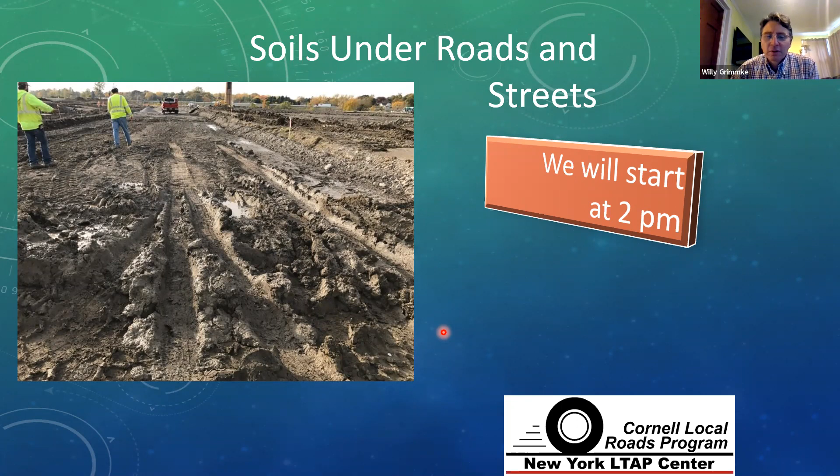Okay, why does it matter? Just by a show of hands, have any of the attendees dealt with pavements that have started to fail due to what was supporting it? If you don't know how to do that, drag your mouse to the bottom, you'll see a participant list, and you can raise your hand down at the bottom. Okay, I see a lot of hands up, and I see one of the hands is Bill Lamy, who was my counterpart in a neighboring county while I was serving in county government. I'm sure he has all kinds of horror stories about failing pavements and bad soils, because in our part of the world, one of the things we were blessed with was the Champlain clay. It's a tough material to build roads on.

So we're going to start out with where we are with our road. Up on the surface that we drive on, we've got our pavement. Below that, we have a base course, often an asphalt stabilized base course, but sometimes stone. Then below that, we'll have a sub-base course, which is often a crushed stone material or a bank run gravel material. Below that, we have our subgrade, which is our native soil, or it's an embankment that we've constructed. That's a lot of what we're going to be concerned about today, although we will talk a little bit about bases, sub-bases, and surface courses.

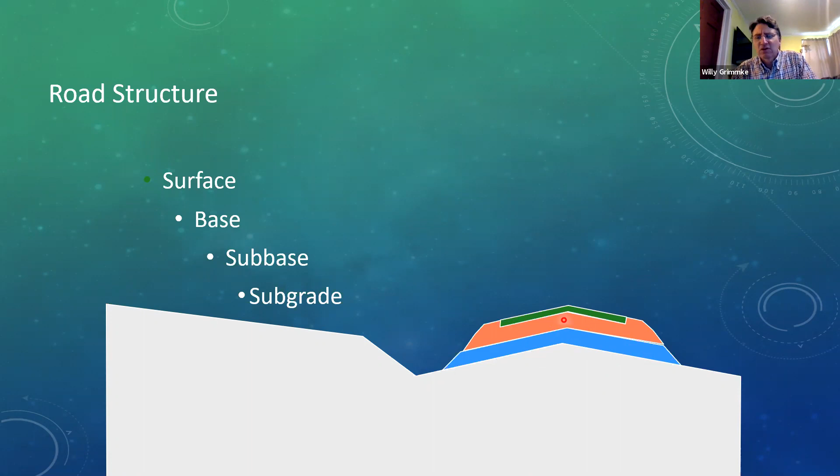So just so everybody's on the same page, when a vehicle drives down the road, it imparts load on the pavement, and depending on the thickness of the pavement, it distributes that load to the various layers below, be that asphalt, base, sub-base, and then ultimately the subgrade below it. I'll show a slide later which demonstrates what happens when vehicle loads travel on soils without that pavement or thickness separation.

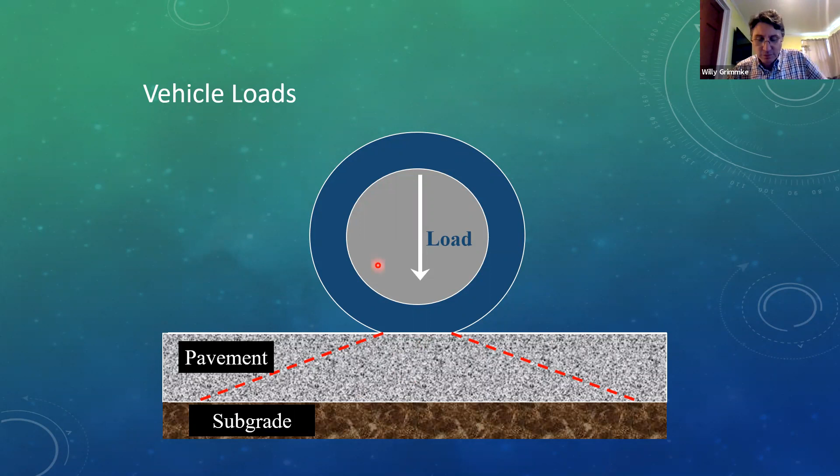What happens as the wheels progress along the road is it will deflect the pavement, particularly with asphalt pavements, which are flexible by design. When anything flexes or a moment is put on it, you tend to get this pattern where it deflects down in a smiley face type manner, and you get compression at the top surface, but you get tension at the bottom. As many of us know, asphalt pavement is not stellar in tension. So what we want to have below is subgrade, subbase, base courses that support the pavement and minimize the amount of flexing so you're not putting it in a lot of tension.

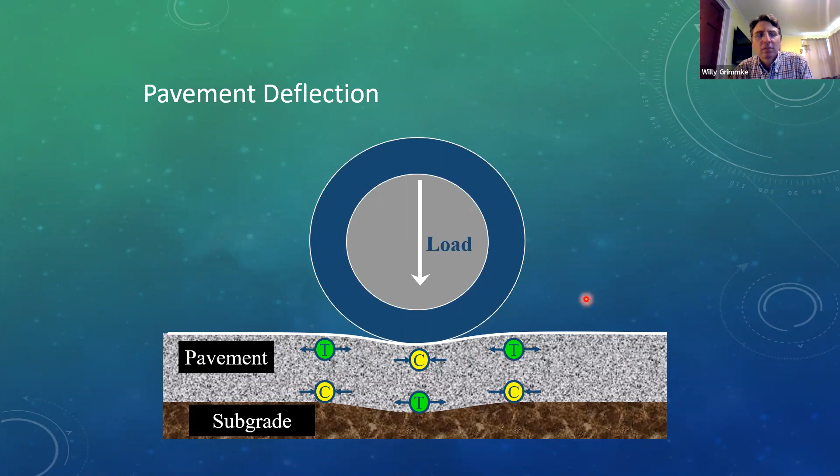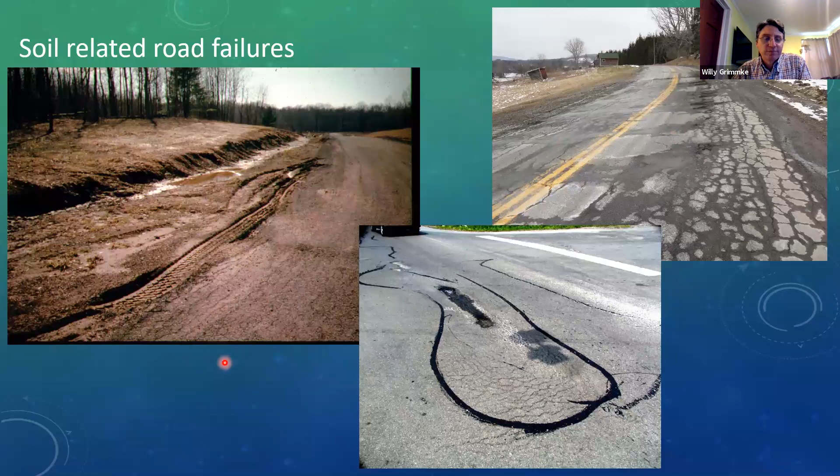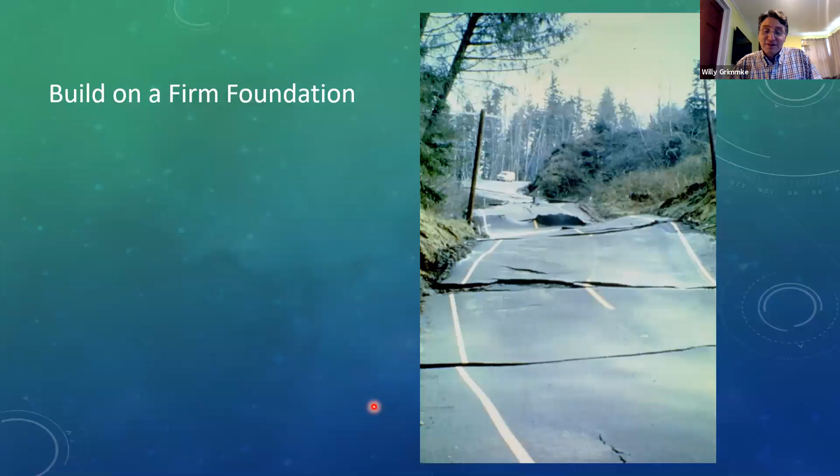So one of the things we're emphasizing here is we want to build our roads on a firm foundation. This particular photo was taken in Alaska after an earthquake, so it's an extreme case, but I'm sure many of us who have been in the road stewardship business have seen pavements, like we saw in the prior slide, that are not built on a firm foundation and begin to fail otherwise.

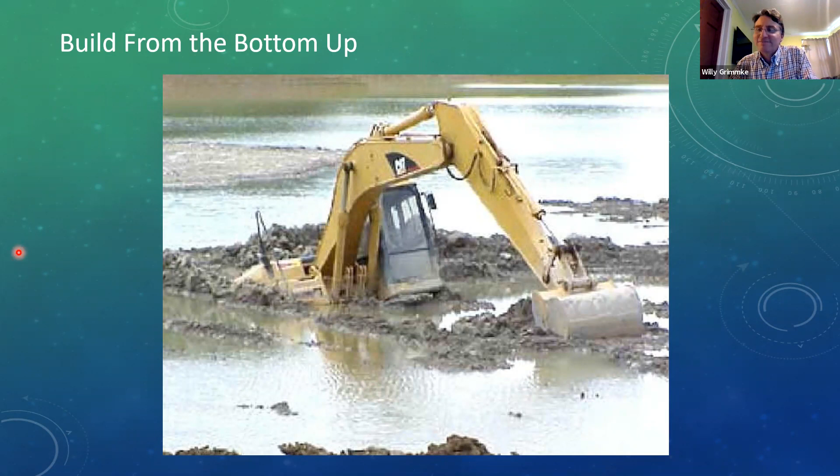Okay, so our subgrade, what we're looking for with our soils, and what we have and how it's characterized. Gravel is in the size range from 1/16 of an inch up to 3 inches—good size material. We have sand, which is from 3/100 of an inch up to 1/16 of an inch. And we have silts and clays, which are particles smaller than 3/100 of an inch, and silts and clays behave a little bit differently.

Now, what we have down below here is gravel. When I was in county government, the town highway superintendents would come to me and say, hey, we're going to resurface our road, or we're going to do some road work, and the farmer down the road has a bank of good gravel that we can use. They would be referring to the blend of size fractions that had gravel sized particles, as opposed to gravel in the soil sense, which is the 1/16 of an inch to 3 inch size only.

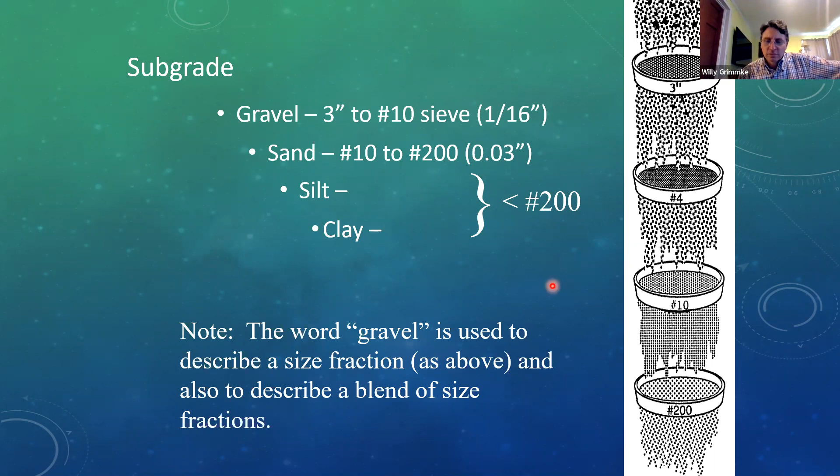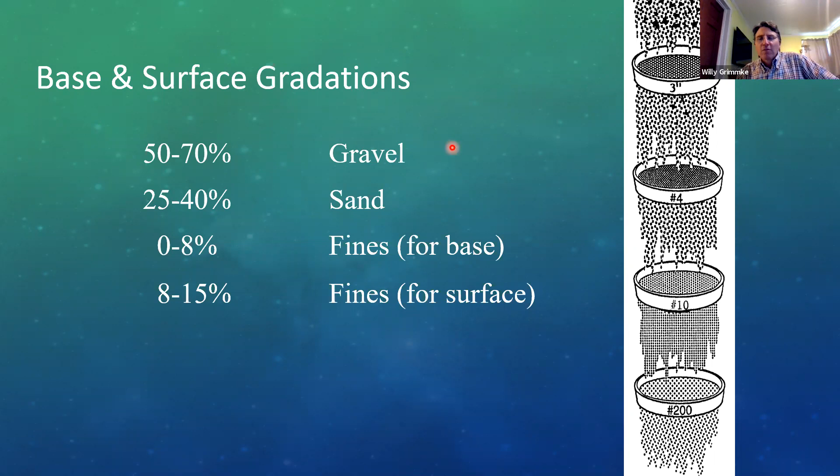So if we're doing base and surface courses, what we're looking for are blended materials that are between 50 to 70% gravel, 25 to 40% sand, and a low percentage of fines. We want 50 to 70% gravel because those particles are big and chunky, and they will help support and distribute the weight. We want the sand to fill in between those voids in the gravel, and some fines in surface course, though it's not as necessary in a base course.

We want fewer fines in the base because we want it to be permeable and we want water to flow through it. Where with a surface course, we want some fines to bind that all together, so when we're driving down the road, it tends not to washboard. The stones and sand don't tend to come apart—it all stays more or less stuck together.

Just a show of hands, has anybody driven down a gravel surfaced road and had it seem nice and firm and hard, almost like it was paved? This typically doesn't happen in March or April, but sometimes in August it will be like that. Okay, yeah, collectively the group has. And that's because that gravel road did have enough fines in it to keep everything held together, and as it dried out in the summer, it tightened up and it was nice and hard.

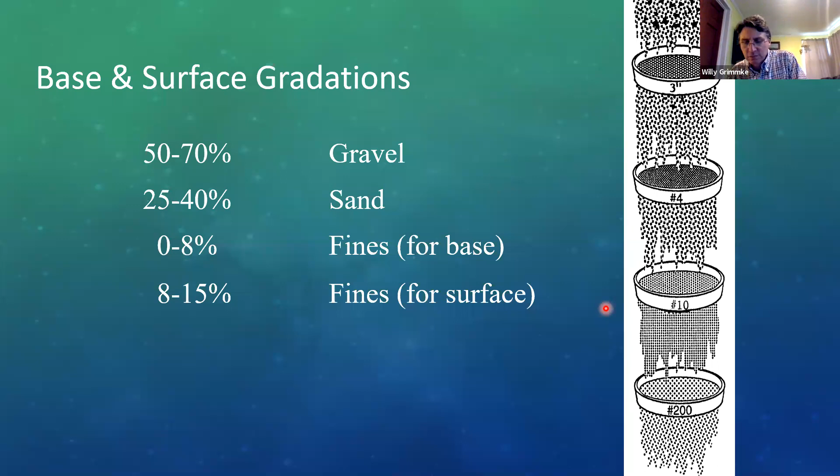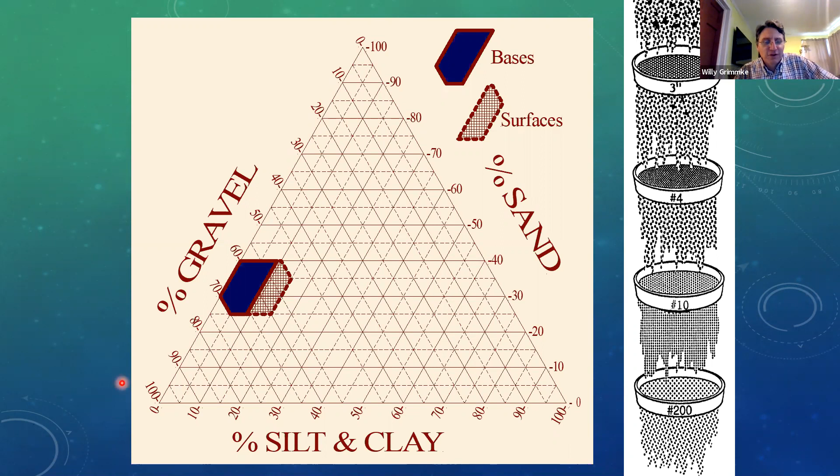As anybody who's dealt with soils will tell you, there aren't any guarantees, and what we're just trying to do is maximize our probability for success.

So one of the things we can do in the field is visually identify what kind of soils we're dealing with. If you have gravels, you can look at it, 3 inches to 1/10 of an inch. Sands, 1/10 down to invisible particles. And then silts and clays.

Does anybody know how to determine whether you've got silt or clay? If you do, you're welcome to type into the Q&A pod.

And we'll see who the winner is. Because when you're dealing with...

Caroline, Gary, roll it in a ball or ribbon hand test. You roll it into a little snake and see if it holds together. If it holds together, it's typically clay. If it falls apart, it typically isn't. Gary says run a gradation or plasticity index test, which is the right way to do it, although some of us don't always have that equipment or time at our disposal when trying to make judgments in the field.

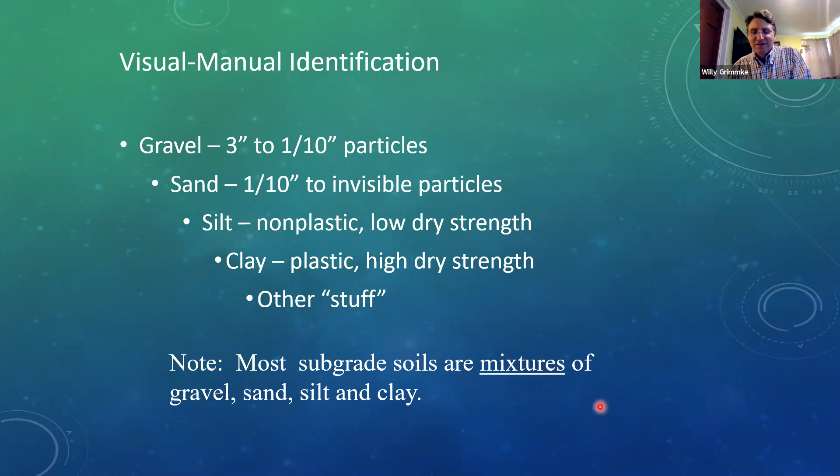So, moving on, how does this affect our pavement? What characteristics of soil are we looking for under our pavement? Permeability being one of them. How much does water flow through it? Is it free draining?

Capillarity - are the voids between the soil particles so small that it will pull water up? Frost susceptibility, which we'll go into in more detail, is a combination of capillarity and permeability.

Stability - can you drive on it, or is it like that first photo at the beginning where it's unstable and you get ruts? Will it compact? Can you get a nice dense soil that will support vehicles? And moisture content, which has a lot to do with compaction - how much moisture is in it in its natural state, and will that allow us to compact?

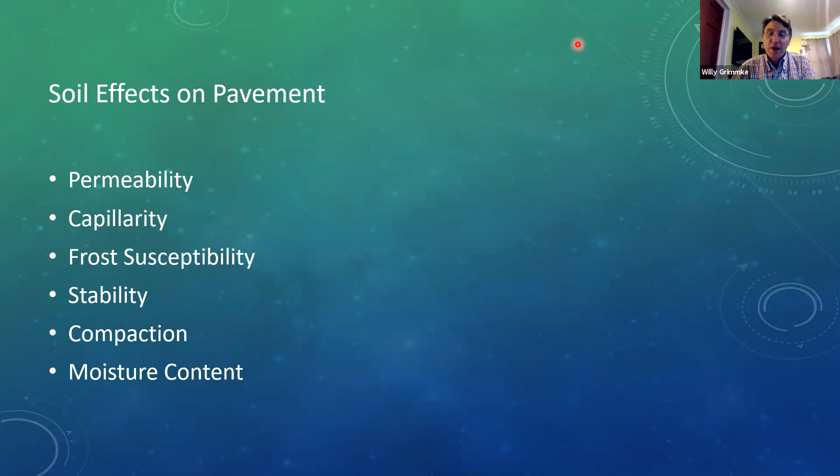Okay, talk first about permeability, and you can see we're all over the park. Gravel can be up to 30,000 feet a day. Water will migrate 6 miles a day through gravel, about 1/10 of that through sand.

That's one of the reasons those of you with exposure to water and wastewater treatment use sands as filters. Silt, not so much - down to 3 feet a day, a little bit of flow, but not too much. And clays, very little. Many years ago, Washington County owned a landfill site jointly with Warren County, and it was all clay because we didn't want leachate going into the groundwater. So clay does not let water go through.

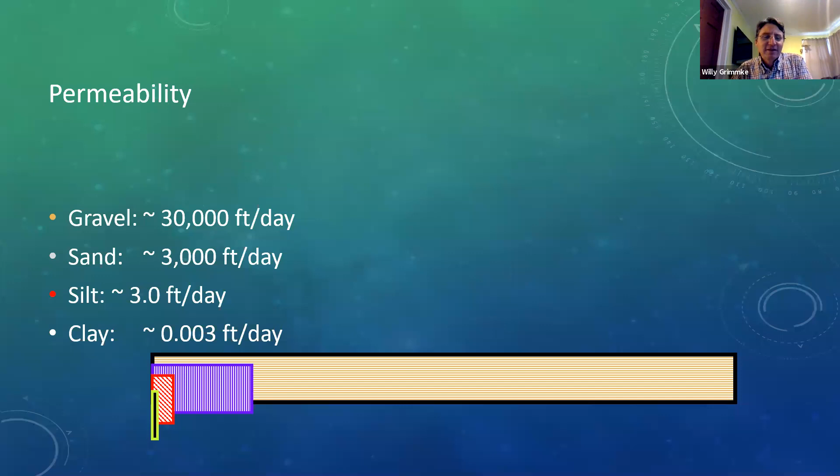Now, capillary rise. Because of the small particles and the voids in between those particles, how high will water get sucked up? With even small gravel, it's very little because the voids are big. With coarse sand, it can come up to 6 inches.

And we do a demonstration in the instructor-led 'Doing Local Roads and Streets Right' class, where we demo capillarity in sand. We pour it in basically a test tube, and you can see the wet line rising about 6 inches over the course of the class. Fine sand even higher, and then silts and clays are substantial - you can be several feet above the water table and still have wet soils because of the capillarity.

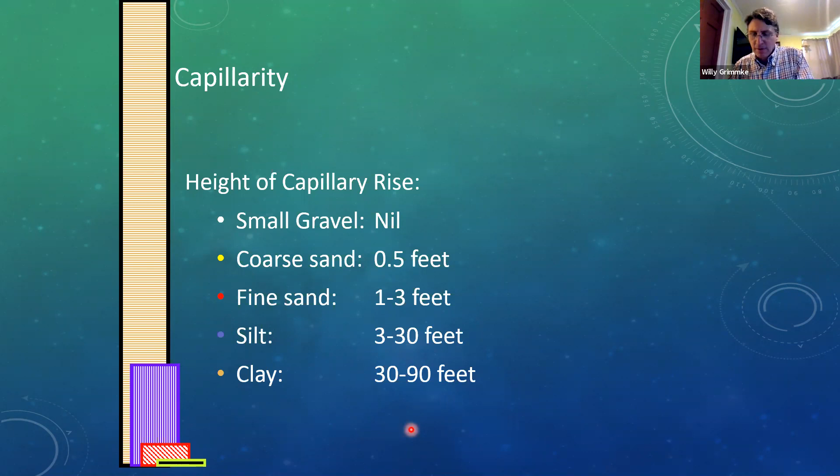So, poll question: Which soil has the highest permeability?

All right, when we have answers, we'll see how everybody's doing. Not quite the 75% there, Willie. We're getting there. Okay, well we'll give them another 10, 15 seconds, and then we'll go ahead and show the votes. But yeah, that's anonymous, folks. We aren't. We just want your guess here. No big deal. Yeah, we're not gonna. Here we go.

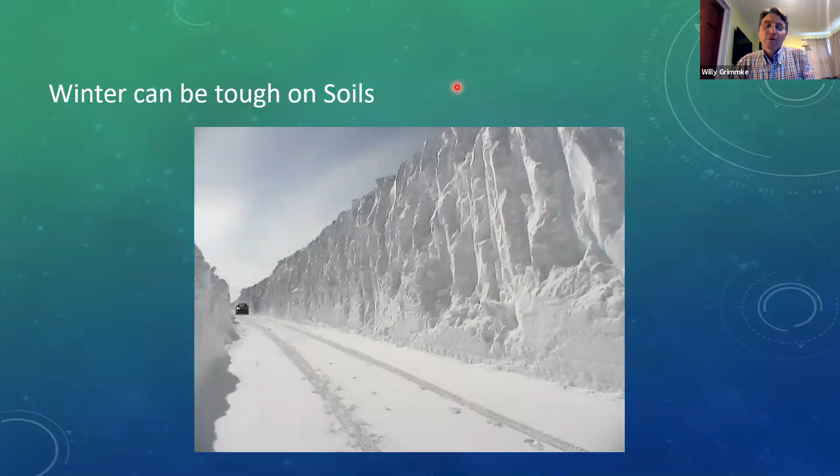Okay, so we'll move on here. Now, we're in New York, and with the exception of Long Island, which doesn't have soils super conducive to frost susceptibility and doesn't get as much in the way of freezing temperatures, the rest of us do. So that's something we are very concerned about with our pavements, particularly in the Adirondacks, in the North Country, where it gets really cold.

So for frost susceptibility, we need 3 features to have a problem. We need a frost susceptible material - something that is likely to perform poorly when it gets cold and wet. We need the cold, we need freezing temperatures, and we need available water to make it wet. And if you noticed from the prior slides, silty soils are that sweet spot.

With permeability, it'll draw a little bit of water, and with capillarity, which will draw it up - that's what gives us the problems with frost heave in silts. In sands, there's a lot of permeability, but not much capillarity, so unless you're right at the water table, you're less likely to have issues with those.

And with the clays, it'll draw it up a lot, but because of the low permeability, it can't draw water up fast enough to build ice lenses, which is what we'll see a little bit later. Now, here in the photo, we see frost heave signs.

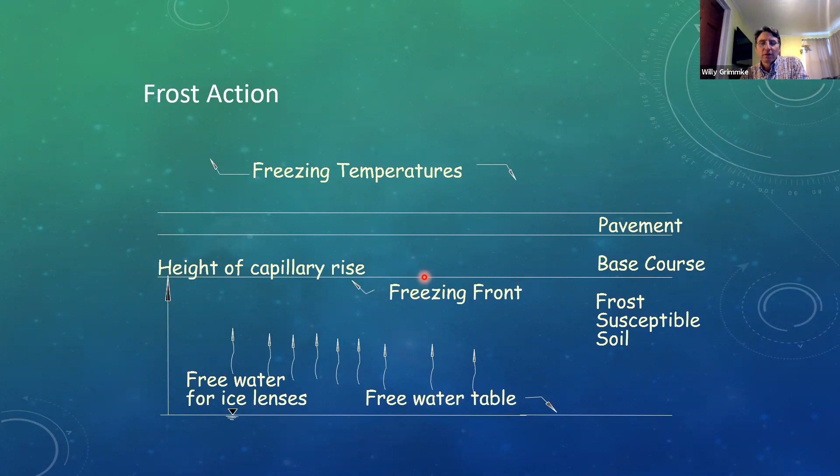So what happens is our pavements freeze from the top down. The freezing temperatures are up above, the earth below is a little bit warmer, and the freezing front migrates down. And as that's happening, depending on the distance from the water table and the capillarity of the soil, it will pull water up. And as that freezing front migrates, ice lenses will form in that material. And that's what causes the heave, because this surface is now higher than the original surface was, because as the water freezes, it expands, and those lenses occupy space.

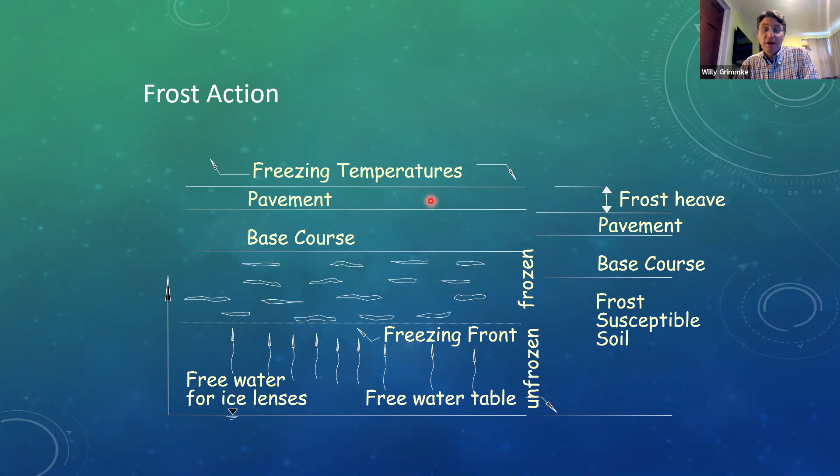And we have coming up a video from the Cold Regions Research Lab. It's going.

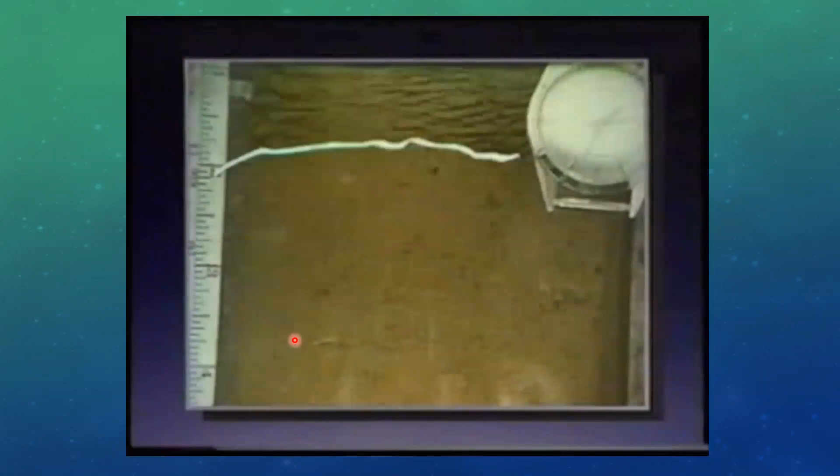We can't hear the sound, Willie. You're going to have to narrate it. What do I'm going to pause it. I think. Okay. I can narrate it for you. I know it pretty well. If you want, go for it.

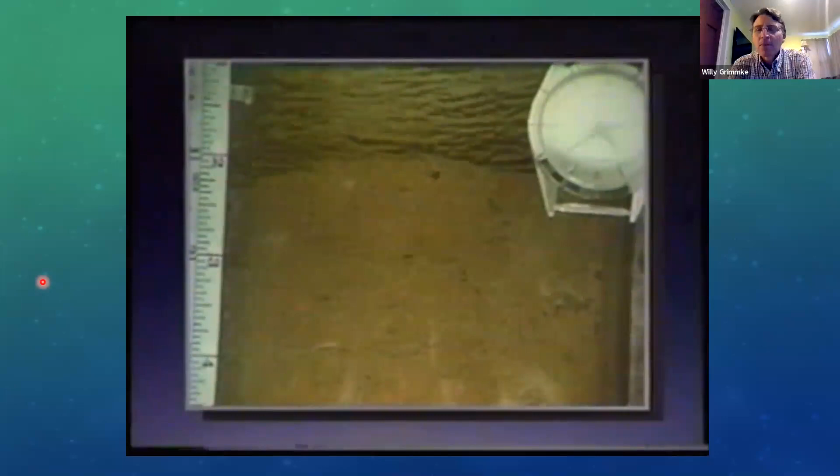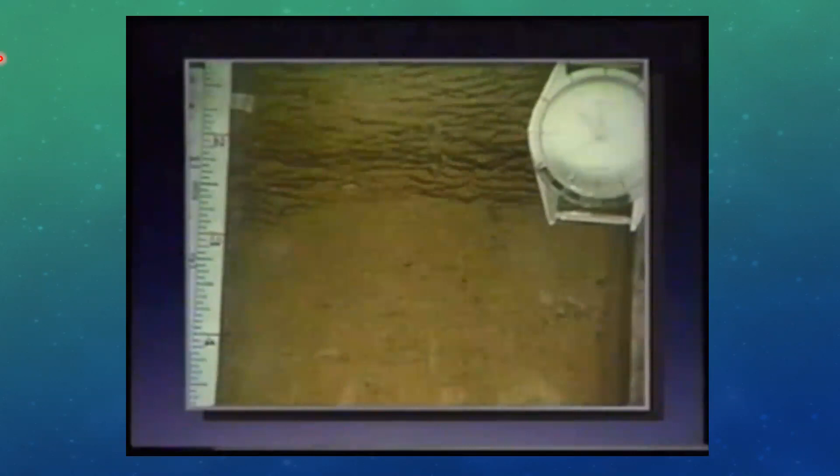So what you're seeing is a time-lapse photography of a freezing front. There was a white line there. There's a scale on the left. You can see it's going up because the soil is going up. And you can see the lovely high-tech timing device that they used to take the video so they could go back and do recordings later on. And each of those little black lines you see is actually a very, very thin, small lens of ice that's being formed by the water that's being pulled up into that particular soil.

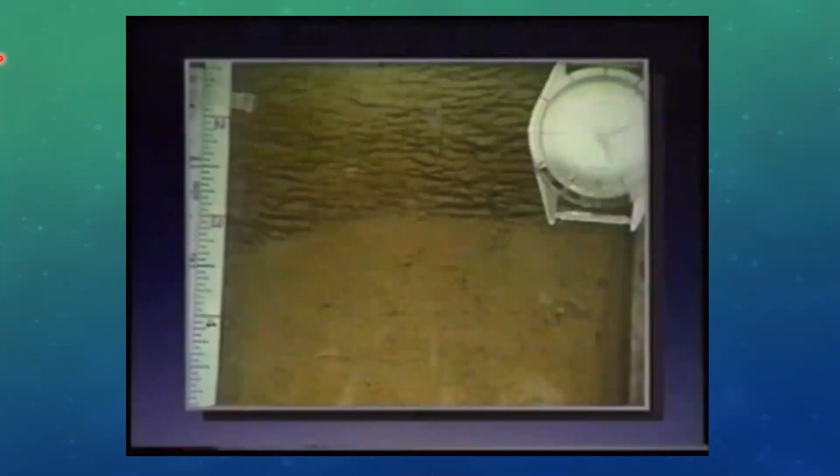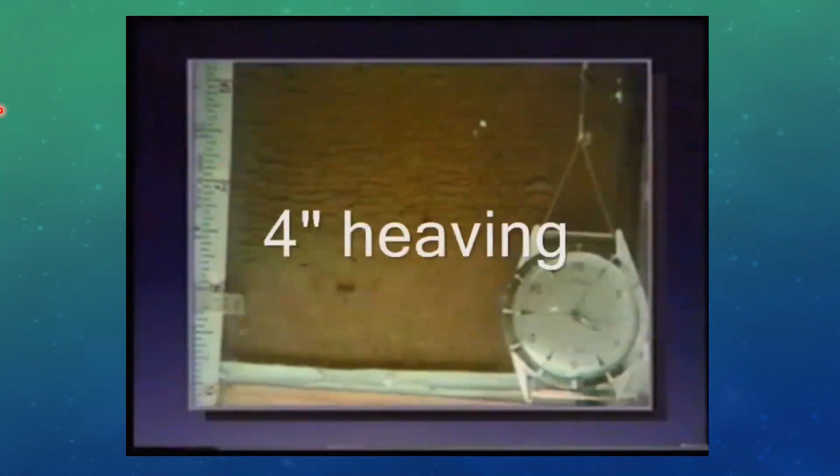So that's what you're actually seeing is the freezing front growing throughout that soil sample. Now, this particular video, they had to move down to the bottom. It's an 8-inch high sample, so they moved their little high-tech timing device to the bottom. You can see the scale is still going up on the left. The test started at 19% water. It ended at 55% moisture content. So all that water is not the water that was there initially. It's the water that got pulled up by the capillarity, and the 8-inch sample heaved 4 inches, half the soil sample height. So I've seen that video just a few times there, Willie, as you can probably guess.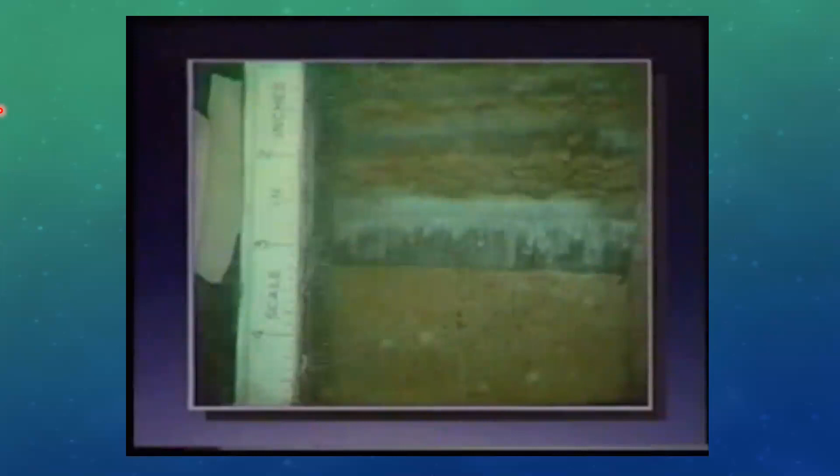And there's one that's more like what we see in the field. That's a 3/4 inch thick lens of ice, and then there's a 1/2-inch one above it. I've seen 3-inch thick lenses of ice. I don't know what you've seen, Willy, but digging them out in the winter when a culvert actually collapsed.

And of course, that water has to drain away in the spring. And where's it going to go? Well, probably not where we want it to go. And it's certainly going to keep the road wet, especially if you have too much of the silt and the clay and stuff like that. And of course, everybody's favorite season, pothole season, comes into play. So, no, I didn't quite narrate it exactly, but what the heck.

Okay, back to you. Okay.

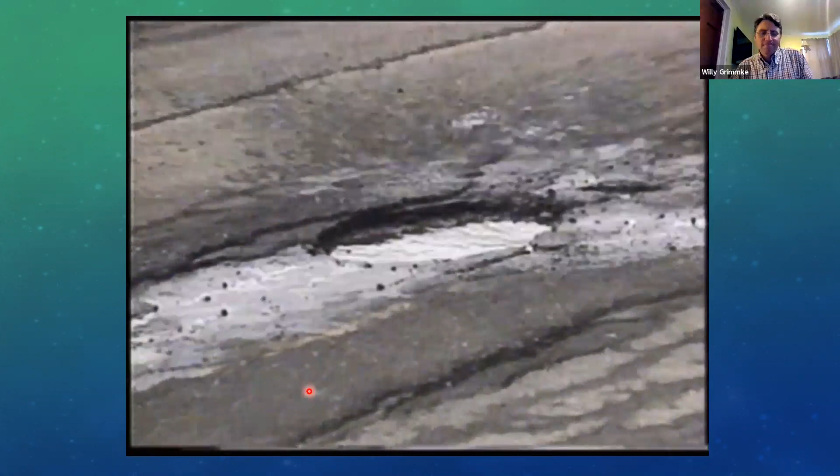So we get to the end of that, and we have the spring thaw, where the warm temperature and the thawing front is migrating down through the soil. And you still have this frozen layer below. So you then have soil with excess water content in it. And as we generally know, when you have soil with too much water in it, we often refer to that as mud.

And living in Washington County, right near the border with Vermont, come March and April, the Vermonters refer to this time of year where everything's thawing as mud season. And because this is frozen below, the water can't go down. So you've just got this big squishy mess unless your soils and embankment are free draining and it can go out the side.

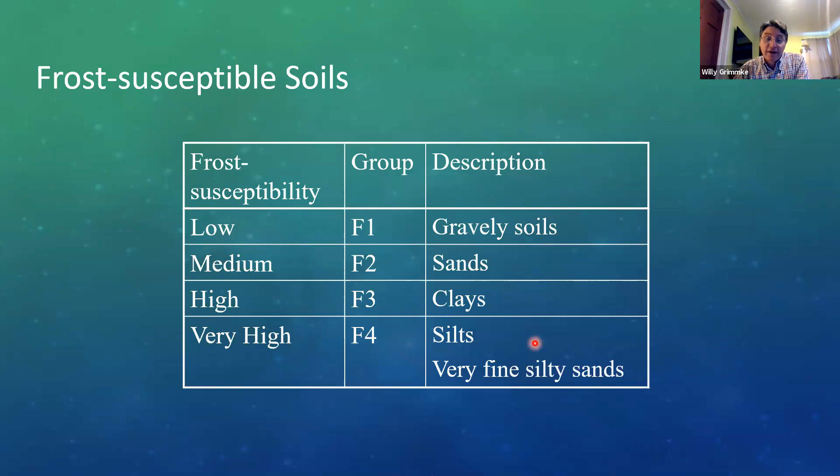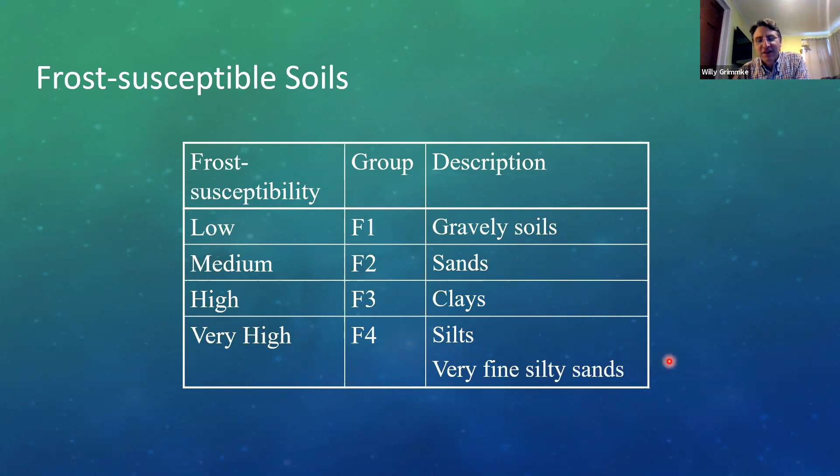Now here's a frost susceptibility group. Gravelly soils, you don't have to worry about them. In fact, in a lot of cases, we will either add fills or undercut and put gravel in if we've got areas with a big frost heave problem. Sands aren't so bad. Clays can be problematic. Fortunately, with clays, they don't have the permeability, so it doesn't draw a lot of water. And then silts, again, that's the Goldilocks, just right, just enough of the permeability and just enough of the capillarity to create all kinds of havoc for us.

Okay, poll question. What's necessary for frost heave to occur? You can choose all that apply.

I expect this one may take them a little bit longer because we're making a multiple choice here. You got multiple opportunities. You can choose freezing temperatures, heavy traffic, available water, frost susceptible soils, or excess salt from snow and ice control operations. Pick all that apply.

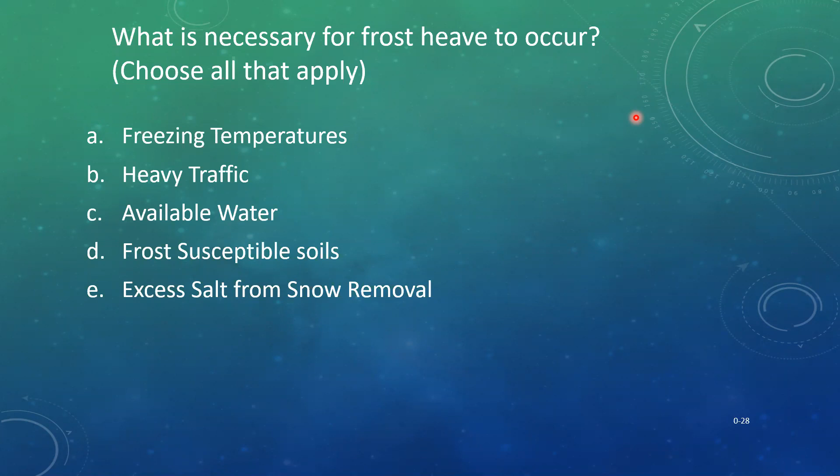Got about half the people have voted. We'll give them another 15 seconds or so, see how many we get. All right, there you go.

Frost susceptible soils, 98%, absolutely. Freezing temperatures, yes. Available water, yes. Heavy traffic will not cause frost heave. However, heavy traffic will create all kinds of havoc on your pavement during the spring melt and during mud season.

And excess salt typically isn't a factor, although if it's thawing, if you've got cracked up pavement and it's migrating through and thawing the surface layer of soil, it could create some problems.

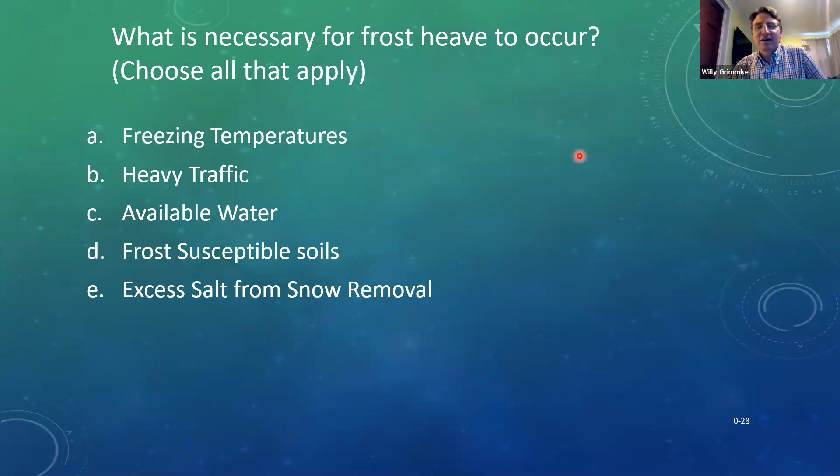Okay, we want to build our roads on a firm foundation. This was out in California after a water main break, but you got to have something you can drive on.

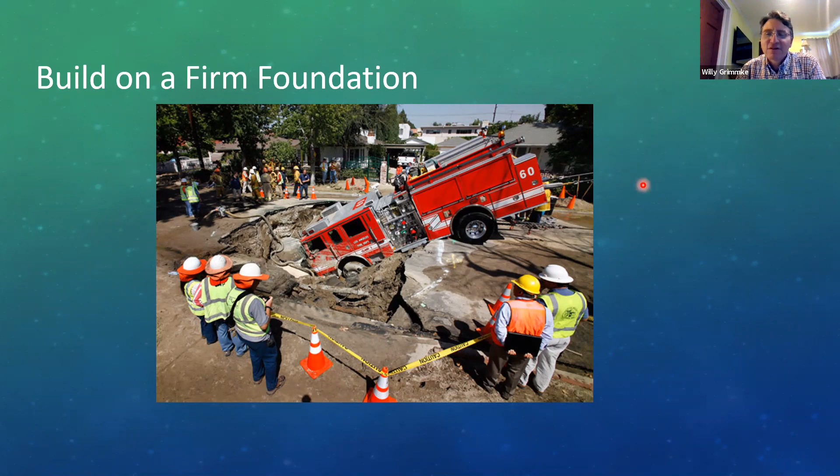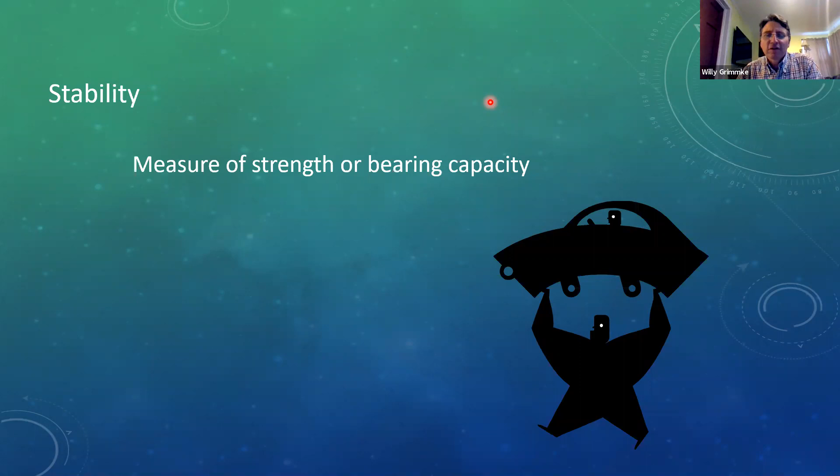Now, stability is how much bearing capacity we have. How much will that soil support? And it's all over, it's everywhere, depending on what you have for soils.

You know, bedrock, 100 tons per square foot. It'll hold buildings up. Now,

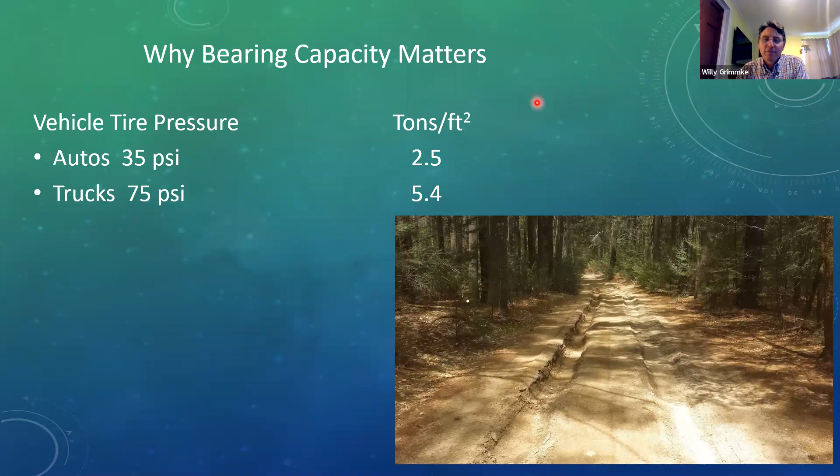Anything below this that doesn't have a pavement or surface on it is going to be a problem.

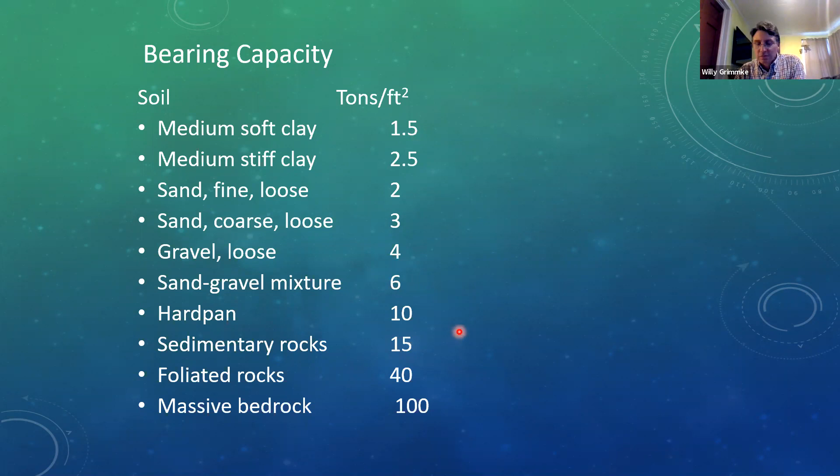So, how do we get strength in our subgrade soils? Well, we want to compact it. We want it so it's as compressed as it's going to be, so it's not going to compress while we put loads on it. And we want it to be nice and stable.

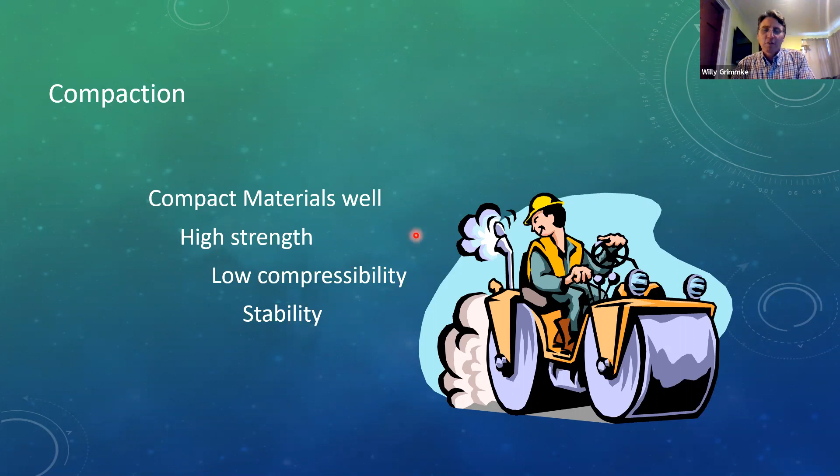So we use varying types of compaction equipment depending on the soils. We have steel wheel rollers here, which are good for pavements, gravels, sands. Rubber tired, usually we would use for chip seals and that type of thing. And then as we're into the silts and clays, we're probably going to be using a different piece of equipment like a sheep's foot roller to try and get those clays and silts compacted adequately.

And if we try and run a steel wheel roller over clays, we tend to just push it around and make a mess. It's like pushing toothpaste around.

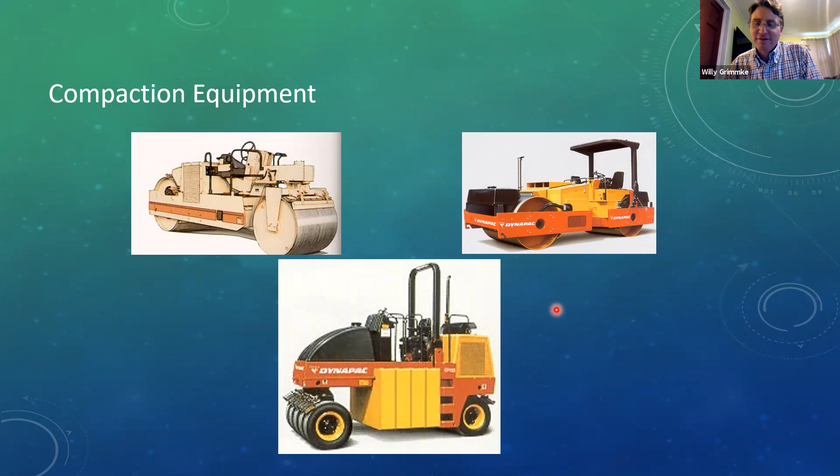So one of the things we want to take a look at on density is how much moisture do we need in those soils to get the maximum amount of density out of it. And we do that by running a proctor test. Basically a lab comes out, takes samples, and will compact the soil at varying degrees of moisture, plot the results in density, and you'll have the curve, which will indicate about what the optimum moisture content is. And then you'll want to add water or let your soil dry out till it's pretty close to the optimum moisture content, and then compact it.

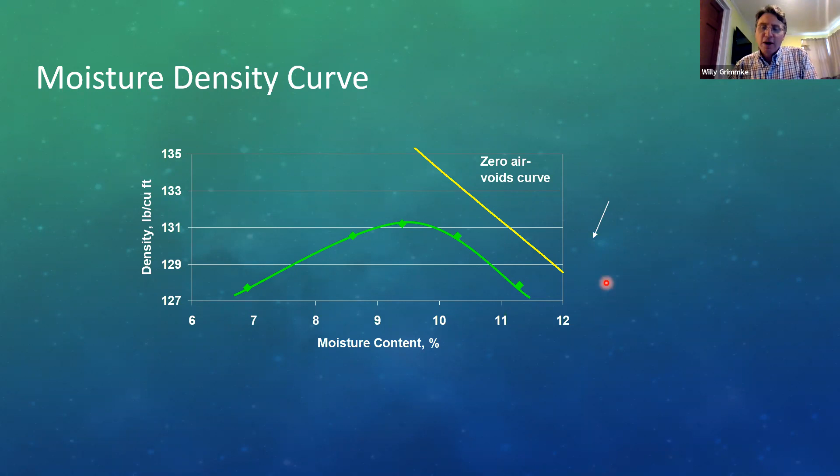I was actually out at a project site today, and we were doing density tests, and they were doing it with a nuke density gauge, and we weren't getting the densities we needed because the soil was just too dry, and the contractor was going to need to add water to it.

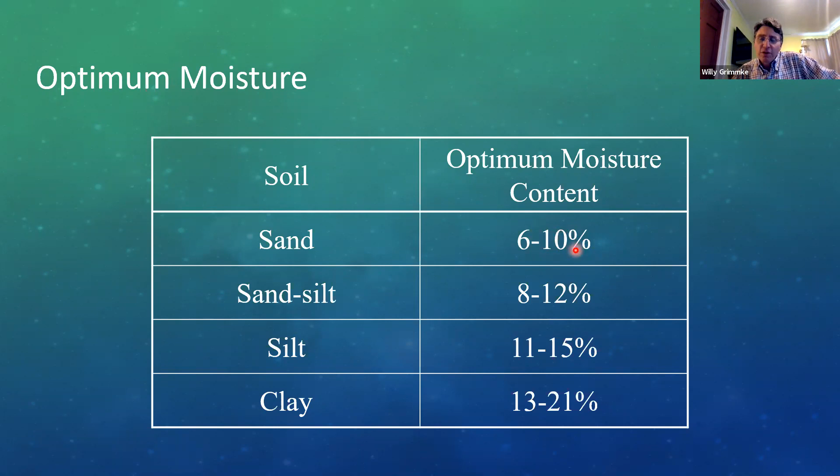So optimum moisture contents: in order to get your soil compacted to the maximum density, sand is 6 to 10%, but as the soils get finer, the optimum moisture content climbs up to 13 to 21% for clays.

Okay, soil summary. Clays, silts, and we're going from fine particles to progressively larger ones. Silt and clay mixes, and we're also going from what are less desirable to build our roads on to more desirable. Silt or gravel with a few clay fines. Sand or gravel with silt fines. And our favorite is clean sands and gravels.

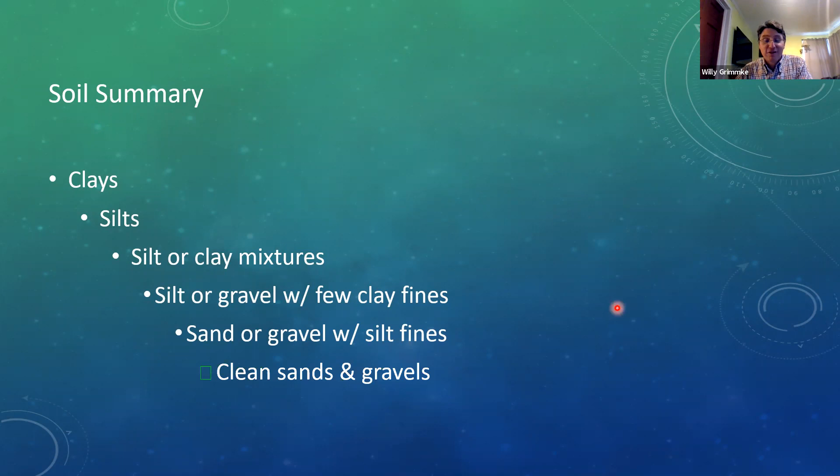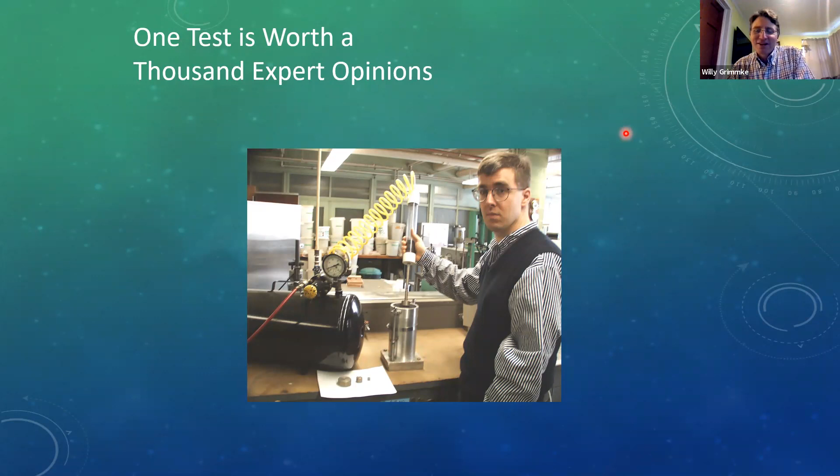Now, David was just a little bit younger when this photo was taken, but he's running a proctor test and trying to determine what the actual optimum density is, not pretending to be an expert and saying, yeah, this is what it is.

Field soil identifications you can use: you can visually look at ballpark gradation. You can tell if it's sandy or gravelly because you can see those size particles.

For plasticity, you can make it into a little snake or a ball if it's a fine grained soil and see if it'll hold together. You can see if it's draining, if it tends to pond water or not. And if you pick it up in your hands, the clays will tend to give you that fine sheen that gets in between your fingerprints, which is one of the reasons they use clays in the paper making industry to make the nice, smooth, shiny paper you get with magazines.

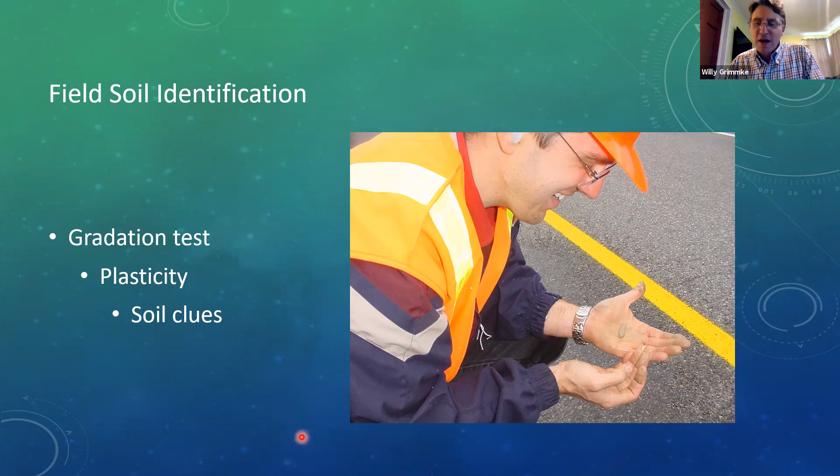So, lab tests you can do: gradation. You dry it out, run it through a bunch of sieves, then weigh up what's left and see what was retained on each sieve. You can also do a proctor test, which we saw a photo of earlier, where you compact several samples, determine density, and then dry them out.

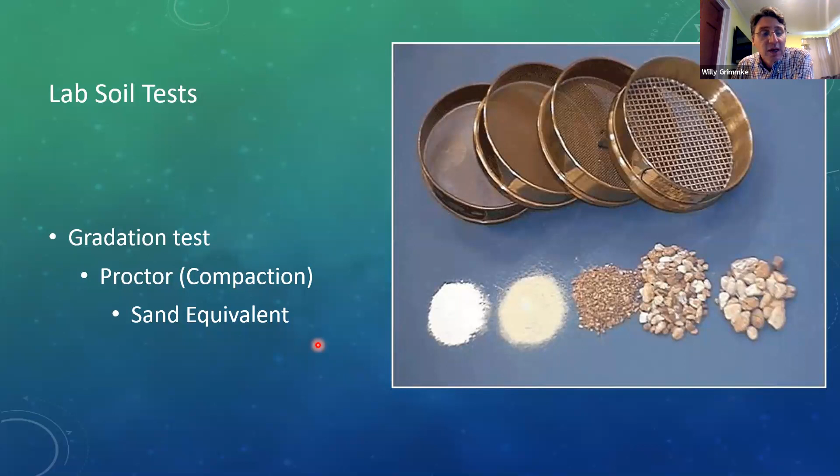And then you can do a sand equivalent test, which you dilute in water with a flocculant, and then measure how much sand, because that settles out first, how much silt and clay, and how much clear water you have left. That gives you an idea of your sand equivalent. For a base course, you want greater than 40. For subbase, greater than 35. And for a gravel surface, 25 to 40.

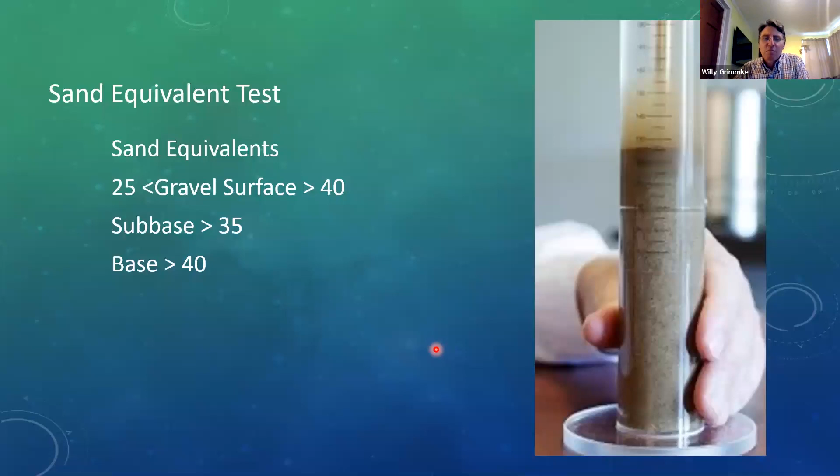So again, we're trying to do things that give us the best opportunity for success and minimal maintenance problems. Now, a lot of us don't have the luxury of building roads on good soils, and there are a variety of approaches we can take, and we'll go over a few of those.

We can just add material on top and build it up and have a nice big embankment. Sometimes that's not economical, sometimes we don't have the room, and sometimes the soil beneath is not stable enough to support that additional weight. But on some occasions it can work.

One of the things I was told about adding material on top: one of the towns here in Washington County many years ago wanted to straighten one of their town roads and run it through a swamp. So on Monday morning, they came in and started hauling sand and gravel, creating an embankment into the swamp, and hauled all day and went home for the night. Tuesday morning they came in and all that material they had hauled the day before was gone. It had sunk into the swamp.

So Tuesday, they hauled material all day, and Tuesday night they went home and came back Wednesday morning and had the same results - it sunk into the swamp. After they did the same thing on Wednesday, they came in Thursday morning and all their material was gone again because the soils in the swamp were so unstable, they just abandoned the project.

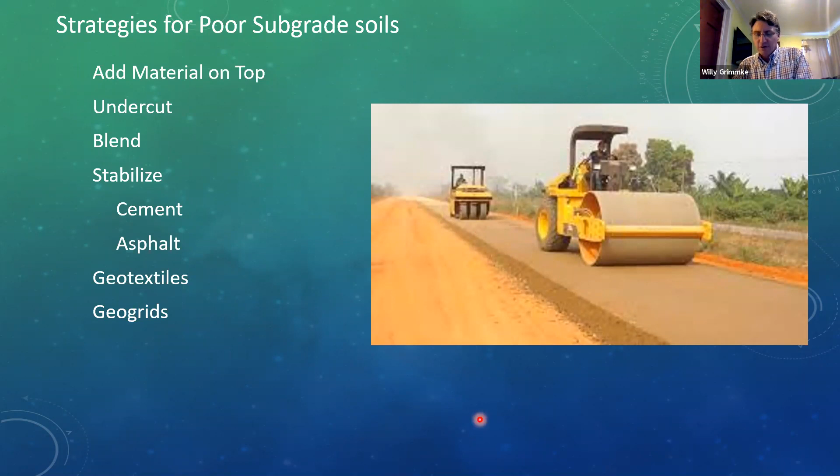And we also have geotextiles and geogrids. Geotextiles do two things: they separate the poor soils from the good soil above, so it keeps the clays from pumping, clays and silts from migrating up into your base and sub-base course and fouling them. It also provides some degree of reinforcement, and some of the woven geotextiles will provide a little bit of tensile strength for when the pavement is loaded, as we saw in the earlier slide.

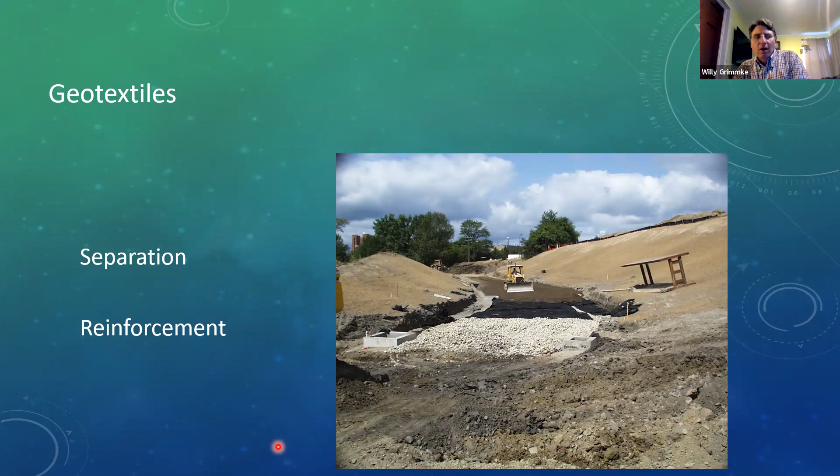Another strategy is geogrids or geocells. On the left, we have geogrid, which is just a big plastic grid that you roll out on the subgrade soil and place stone on top of it. That geogrid provides tensile reinforcement underneath the stone, and the stone locks into it. And quite frankly, if that town was doing the road on the swamp, a geogrid might have enabled them to cross it.

Over here is a geocell, and those cells are laid out and filled with stone. This is actually in Warren County, New York, where there was a swamp, a wet area with poor soil stability, that was undercut, and they put the geotextile underneath, the geocell on top, and filled it with stone and constructed the road on top of it. The geogrid or geocell was actually a military application, so the military could quickly and effectively construct a runway to land planes on, like beaches.

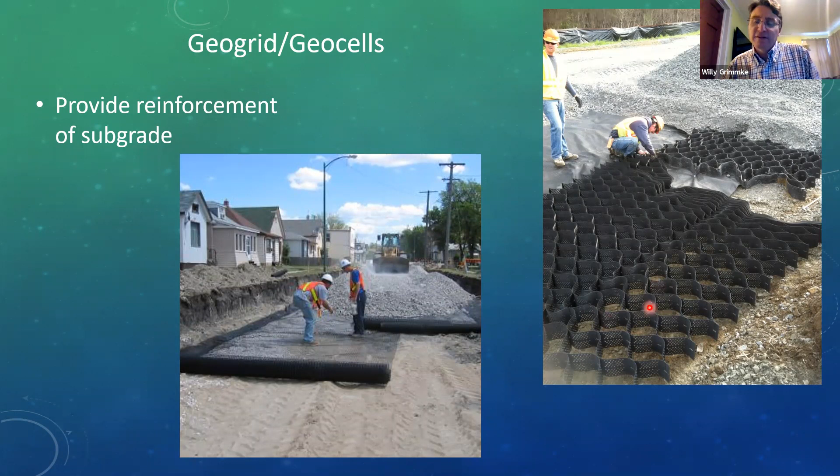Okay, base and sub-base material. You want granular material with angular particles. You want angular particles because if they're nice rounded particles, they act like ball bearings, and under load and traffic, they will start to move and rut. We had that in Washington County. We had a pit that had granular sand or rounded sand, and it was a tough material for building roads.

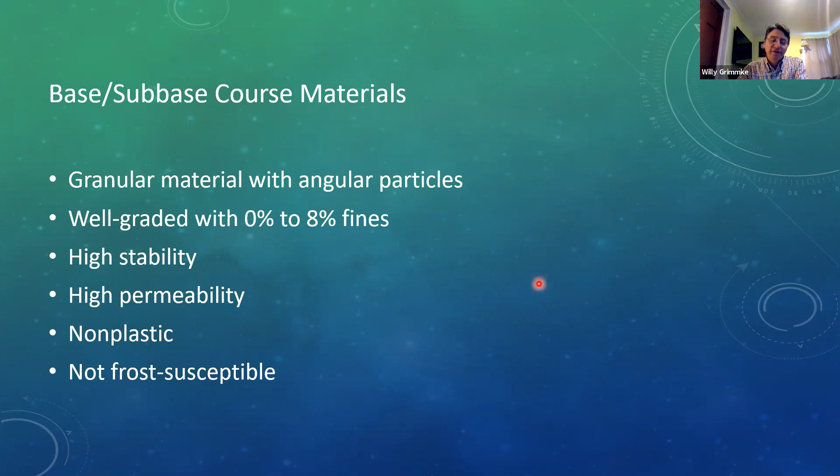We ended up with a lot of ruts on roads built with that. We want well graded material with very few fines, so our permeability is high and water will drain out of it. We want it to be stable, able to drive on it and support the pavement above. We want high permeability, again why we want low fines. And we don't want something plastic, sticking together. We don't want frost susceptibility, otherwise we'll have frost heaves all winter, and then potholes in the spring.

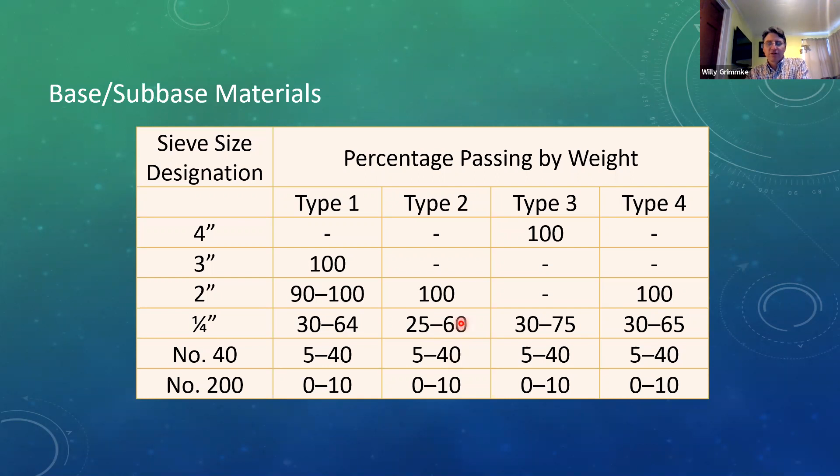Okay, now we don't want to pave or put a hard surface on anything that won't support it. But once we get to that point and our subgrade and subbase will support it, there are a variety of materials used around the country, and in New York too. We've got asphalt, which seems pretty common for local roads and a lot of state roads. We've got Portland cement, used not only on high traffic roads like the Thruway and interstate highways, but in some western states like Nebraska, Washington, and Colorado, their local streets are often Portland cement.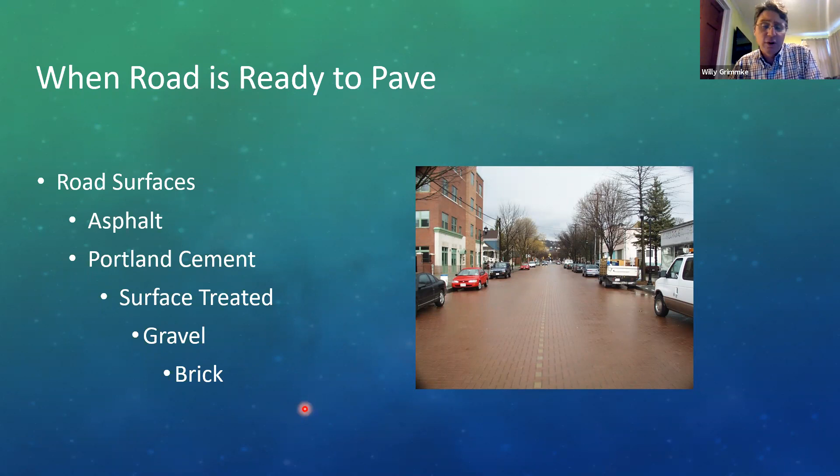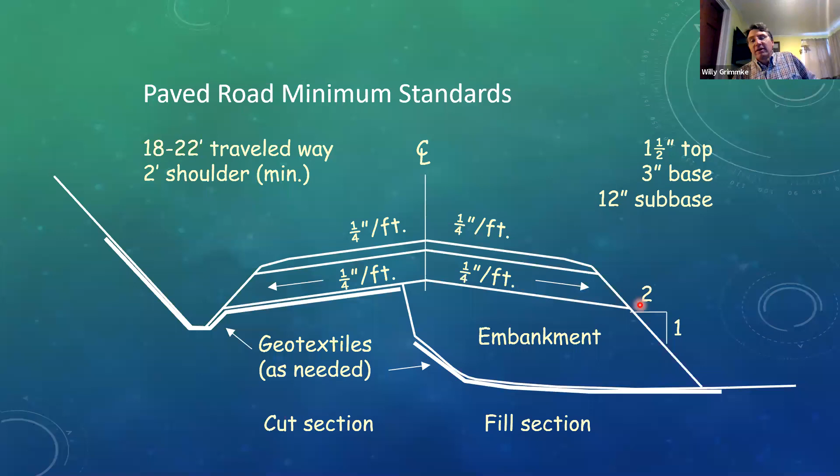Now, time for a poll question. What properties make good base course material? Pick all that apply. We're getting a few votes in there, Willie. About a quarter have voted so far. You can choose from rounded particles, low fines, high stability, frost susceptibility, or high permeability.

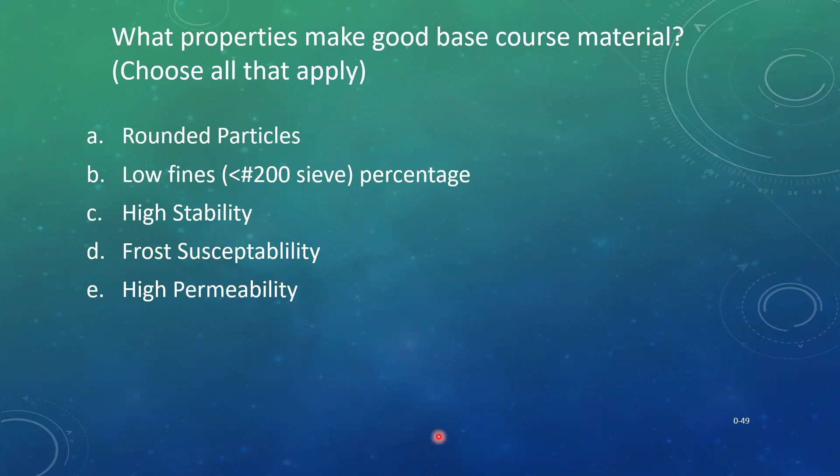Almost 2/3, we're getting there. And by the way, you were correct, that was pavers in the city of Ithaca. They're made to look like brick, though, but they're really pavers. I'll have to get one of my high school classmates down in St. Pete to snap some brick street photos for me. We have some brick ones here, I can get you some pictures. I even have a brick from one of the old streets. I used to ride my bike on them, and they were loose. As I'd ride my bike down the crown of the street, the bricks would rattle a little.

Okay, well, we're going to get started here because we've got about 10 minutes to go. So here's your answers. High stability, definitely. Low fines, absolutely. High permeability, we want that, we want it to be free draining. Frost susceptibility, we typically don't want that because we don't want to deal with frost heaves or potholes. And rounded particles, we don't want, and I can vouch for that with the Washington County experience, because it just acts like ball bearings.

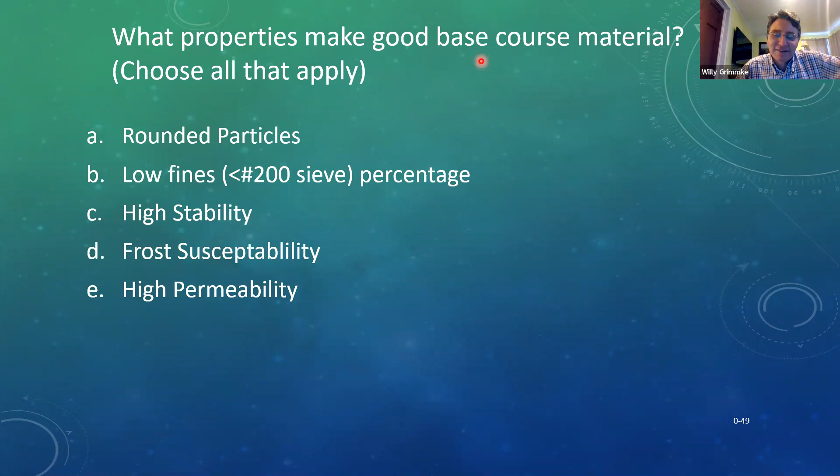Okay, so another thing we can use is cold mix asphalt concrete. You're just using aggregates, but you have to have good evaporation because it's an emulsion, and you want it to evaporate and break. Otherwise, the stones will just come out of the loose material.

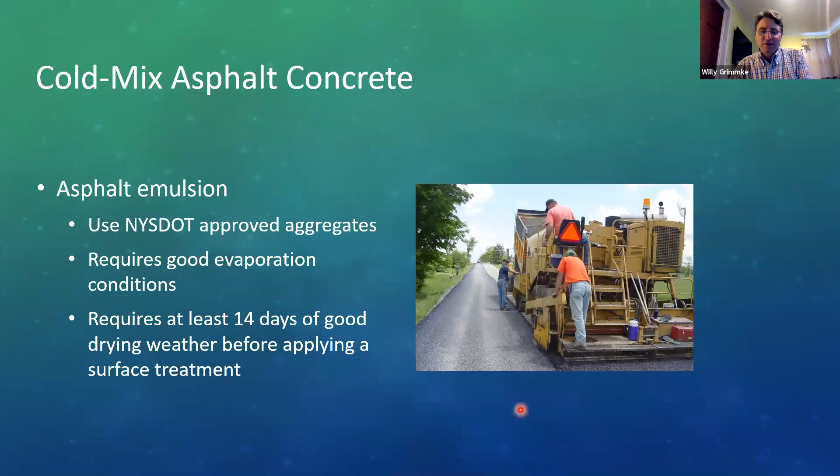Hot mix, which is what we commonly use, DOT has their spec. We want to put it down when it's nice and hot, 250 to 325 degrees. If it gets below 185, it doesn't compact well. And if we're trying to compact it as it gets into the tender zone, which is often between 240 and 185, it will just push around and you'll have lines and creases in it, and you'll be chasing those around all afternoon until it cools down below 185 and you can get it out.

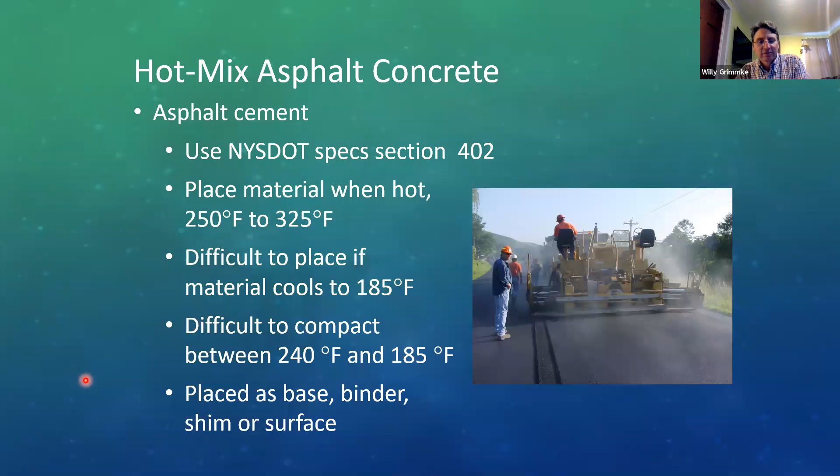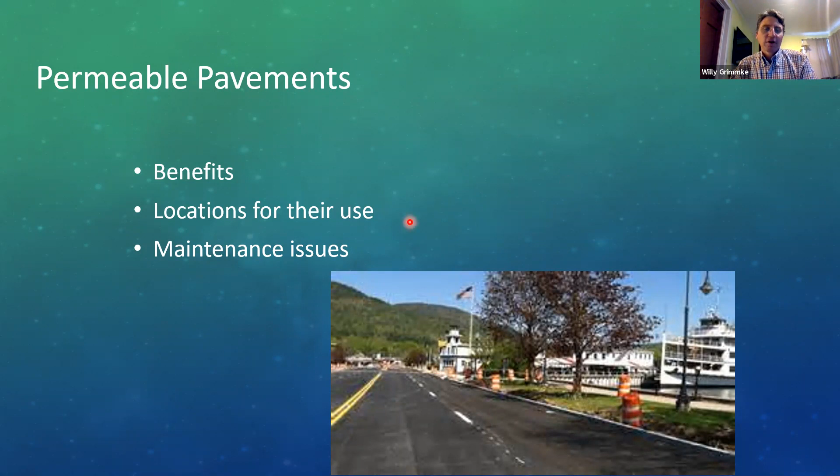Permeable pavements in Warren County and along Lake George. They put permeable pavement in, and it's open graded, and the water flows through the pavement. But in order to keep it functioning, you have to clean it on a regular basis. So there are maintenance issues, but it minimizes runoff.

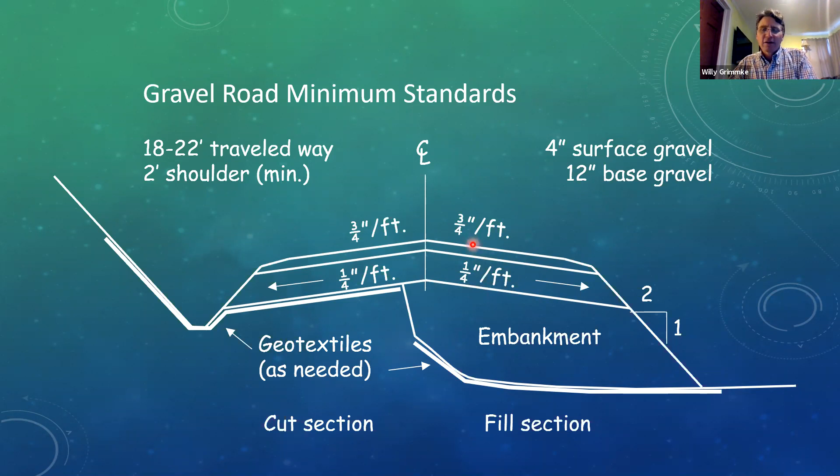Now, if you recall in the earlier slide with the surface road, we had 1/4 inch per foot on the top and the bottom. Here with a gravel road, it's 3/4 inch per foot on the surface, because gravel roads tend to become somewhat irregular over time, and we want enough pitch to get the water off the surface so it's not sitting there. This is predicated on a 12-inch base course and a 4-inch surface course, and it's not the same material—you want fewer fines in the base and a little more fines in the surface to hold it together.

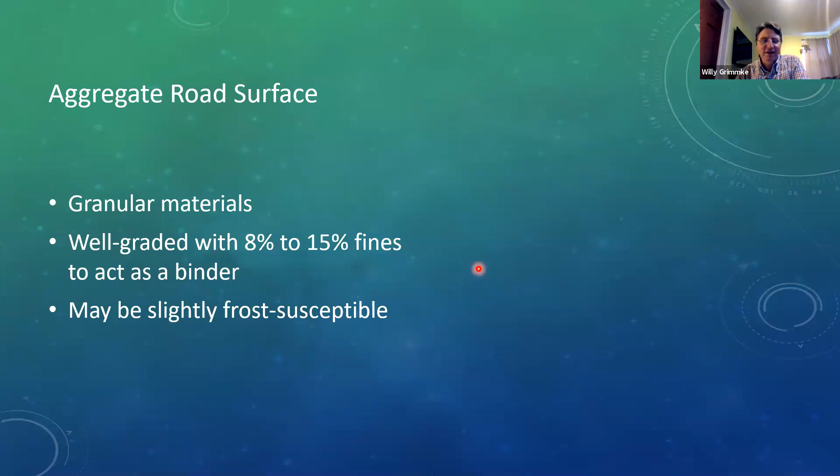Okay, so aggregate road surface: you want granular materials with 8 to 15% fines. That thin layer may be somewhat frost susceptible, but hopefully it's thin enough that it's not a big factor, although it may thaw out during mud season.

So, poll question: what methods can be used to mitigate poor subgrade soils? Pick all that apply: geotextiles, increase the traffic on it, stabilize the soil, eliminate the base course, or use geogrids.

They're coming in, Willie. We got about 40%. Okay, good. We got one person put it into the Q&A pod, but that's been going all the way along. They're getting the same answers as everybody else too. So that's good, that's good.

Almost there. Stay on target. We'll give them another 5, 6 seconds here. We'll go ahead and show the results. There we go. Okay. All right.

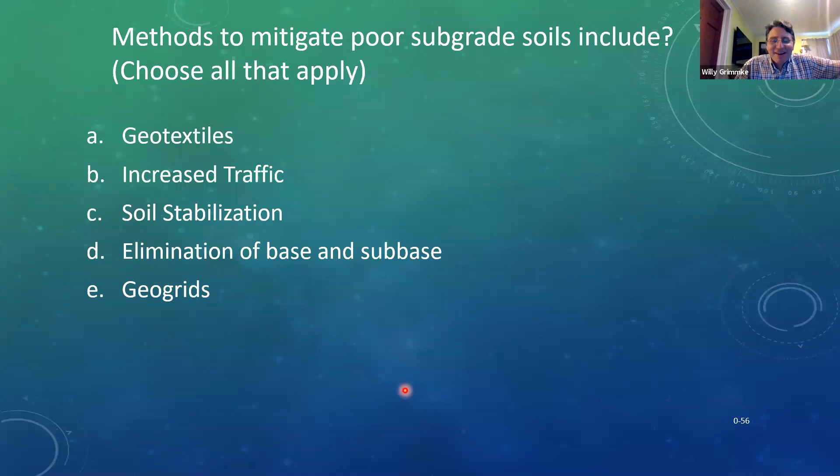We can use geotextiles, we can stabilize our soil, we can use geogrids. And there's always one—we probably don't want to eliminate the base and subbase. That will make it worse, and a lot more expensive, because you'll be using a lot of asphalt or fixing things frequently.